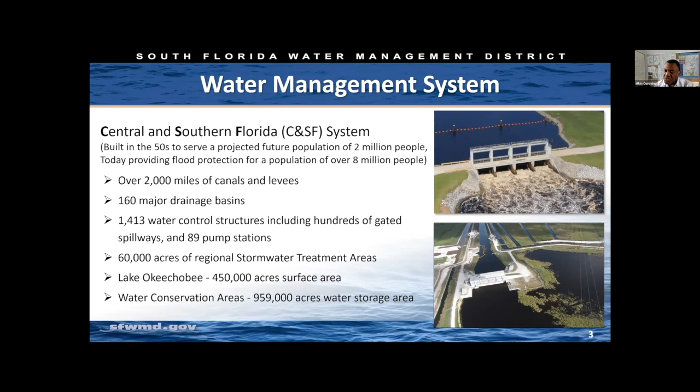It includes more than 2,000 miles of canals, 2,000 miles of levees, serves about 160 major drainage basins, and includes more than 1,000 structures. Today's talk is going to be focused on some of those structures, especially the ones that are coastal structures. So I'm going to try to set the why with this.

I'm showing a map to the left of South Florida. The dots in red or green are coastal structures. These are salinity barriers. They are gated spillways or gravity structures. They go along our coastline. Anything downstream of them is directly connected to the ocean. And there's a picture on the right that shows one of those gated spillways.

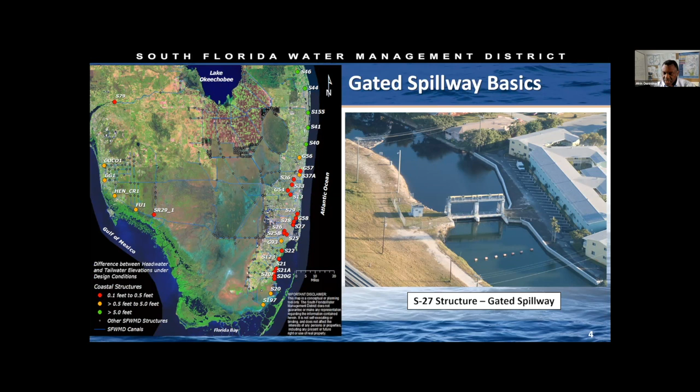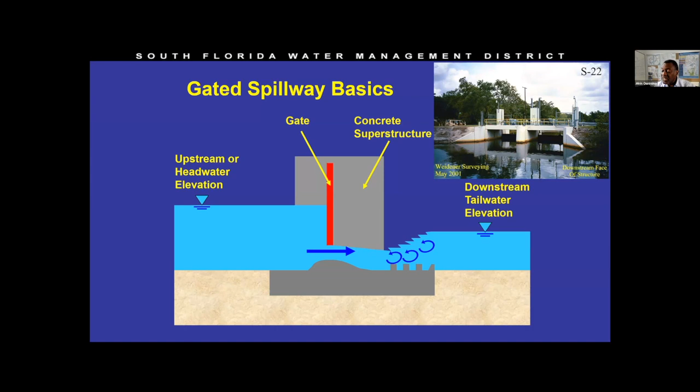The operation is a little bit complicated, but there's a way to simplify it to make my case. Assume that there are 2 levels that we base our operations on. Now, there are a lot more, and my water managers will be very upset, but this works. You have an elevation at which you open the gate and one at which you close the gate. Under normal conditions, you'll have your gate closed. You're holding on to water.

In Florida, with the flat conditions, you want to hold on to as much water as you can without draining it to tide. But if it is the wet season and it rains, your inland area would fill up. The canals will elevate, and you'll open the gate to manage that elevation, because uncontrolled, it increases your flood risk. Eventually, the event ends and the water levels will drop. And when they do, you get to the close elevation at which you want to close the gate because you don't want to overdrain.

And part of the risk of overdraining is if you drop the water table sufficiently, you might induce saltwater intrusion, or you might have flows coming into your system that's undesirable. So what we're beginning to see more and more is that

with sea level rise and the appropriate king tides, you're having conditions when your tailwater elevation exceeds the gate open elevation. And under these conditions, if you have a rainstorm, you would actually not be able to open the gate, because with the gravity structure, it's an equal opportunity passer of flows. Flow would come from the ocean side into the inland side, contaminating the aquifers, potentially putting water supplies at risk.

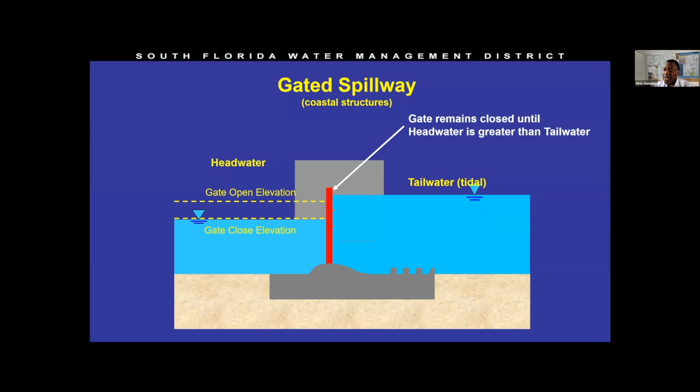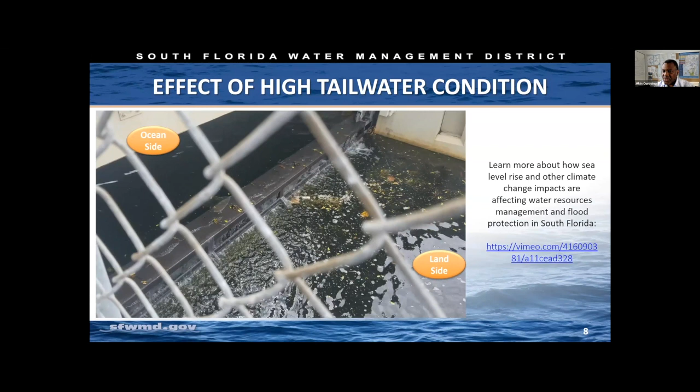Now, this might seem like some kind of distant future, but it's not really for us. The video I'm going to show you here is a snippet that was captured a few years ago with the king tide and the wind just right. You actually have a structure that's supposed to be flowing from right to left, and you can see that the water is actually coming back over the closed gate.

So the system I described to you is a primary system. The primary system is the one that the district and the U.S. Army Corps of Engineers is responsible for. But flood control in South Florida is managed through a three-tiered system where the primary system takes water from the secondary system and sends it out to tide or to storage for restoration purposes. But the secondary system collects water from the tertiary system, which is actually where people live.

So homeowner associations and large landowners manage their stormwater ponds. That's part of the tertiary system. They discharge into canals that are run by local government or special drainage districts. That's part of the secondary system. And they in turn discharge to the primary system. So for flood control to work in a region, we need to all be working together to make the system work. And for that, we had to take a total system approach.

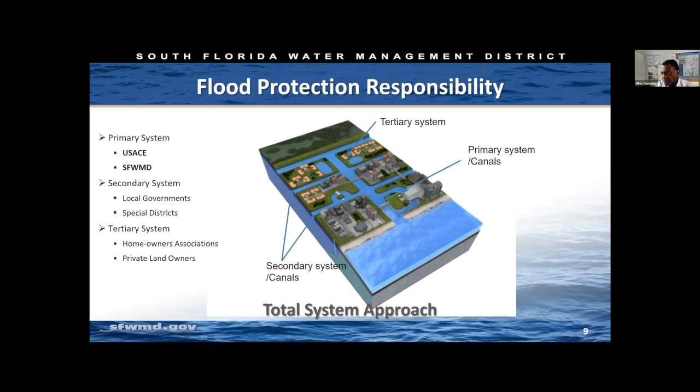Now, what are the sources of uncertainty? You've heard many of them over the last 2 days. I'm going to summarize a few here. Climate, clearly we're all thinking about climate. And in South Florida, with the gravity structures, sea level rise is a real problem that we're dealing with. And the uncertainty of predicting how much rise you'll have is one of the big uncertainties we have to deal with. Rainfall is another. And storminess and the effect of storm surge is another that we know that we have to manage and include in some of our thinking and analysis.

Another one for us is land use and development changes. When the C&SF project was built, it was projected to serve a population of about 2 million people. Today it serves a population of about 8+ million people. And many of the areas that were designed to be maybe agricultural fields or open areas where you could store water are now cities, which during rain events have to shed water.

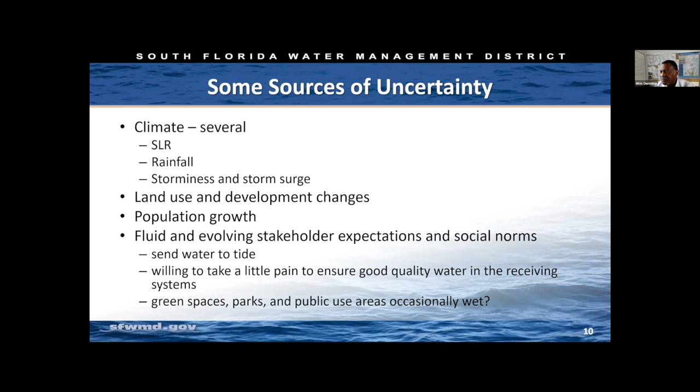A third area, which is an interesting one for us, is the fluid nature or the changing expectations of our stakeholders and the societal norms with regards to what they would accept to provide flood control. 30 years ago, it was simple. You safely send water to tide, and that's flood control. Today, we couldn't do a project that sends water to tide without looking at the water quality impacts on the receiving water system. There are a few other things along those lines, but these are all uncertainties that affect our planning process. To be able to plan adequately, we have to actually modify the traditional planning approach.

There are many good parts of the traditional planning approach that we retained. And on here, I'm kind of trying to show you some key distinctions between what we do now and what we used to do in the past. In the past, you plan for a future date. You try your best to get things projected accurately for that date, amount of rise, amount of water use, what would be in place. We've kind of found that could be somewhat limiting, especially with the uncertainty in this case and looking at climate-related impacts at a window of about 50 or plus years.

You identify courses of action, you evaluate them with models. These are all good things and we'll still continue them. We determine the cost of the potential adaptations and we compare that to the cost of doing nothing. And you come up with a cost-beneficial project to drive investment. And then we implement the projects over time and then track to see how well they perform. The changes we've made to that system in what we call an adaptive resilience planning process is we retain most of the things in the traditional planning process, but we have this requirement for a remain functioning condition.

A colleague of mine uses this a lot, but essentially what we're talking about is between the time you actually plan your project and that future condition you're aiming for, you want to make sure that the system doesn't break in the middle someplace. And so your analysis should look through time and make sure that your projects are sequenced to avoid you getting into some unacceptable conditions.

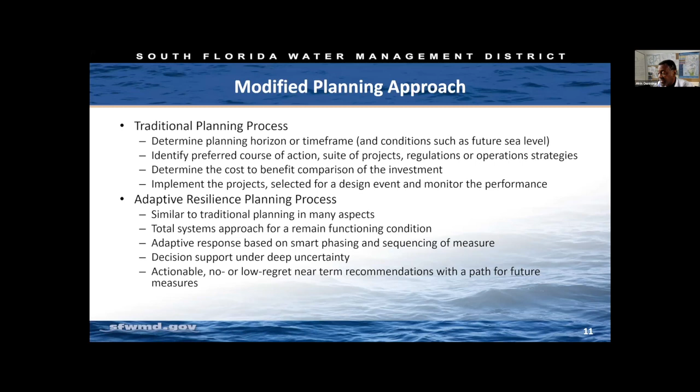You want to come up with projects that are properly sequenced and that are adaptable. Also, we want to make sure that we can identify no regret or low regret strategies that can be implemented early. And I'll speak to this a little bit later.

So the approach we use can be defined by this model. And it was one of the early decisions we had to make. If you couldn't tell exactly how much sea level rise you'll have in 2085, is there some other way of posing the question that makes our hydrologic tools capable of addressing the question that's been raised?

And what we came up with was this approach that says, if you can determine a state or a threshold at which your system stops performing the way you need it to, it might be possible to use that information and the knowledge you have on how long it is to develop a project to determine when you must be risk aware and have initiated a solution.

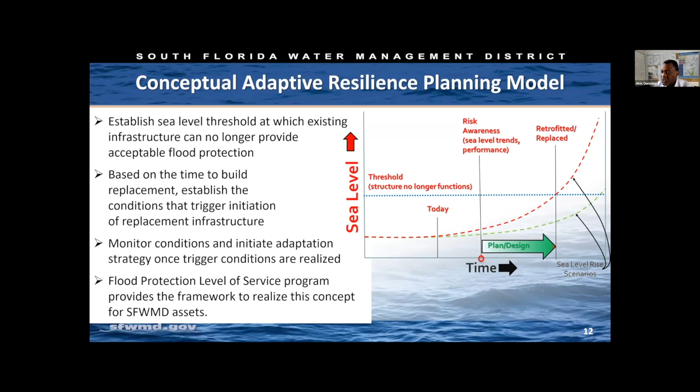We kind of found that we could do this with many of our structures. A lot of the things that we do, we were able to rephrase the question in a way that makes our models useful. And we kind of imbibed this, or incorporated this, into our planning process.

This is the same slide. I grayed out the background, retained it only to show the 3 different time frames. And I just use this to reinforce the remain functioning concept. If the red is some system response relative to an acceptable threshold of performance, you have a system today that is slowly getting worse, and you want to make sure that you keep implementing solutions in some way that makes sure that you don't trip that threshold, you don't reach that tipping point.

Now, some of them could be small lifts, and some of them could be big lifts, if you're looking at something that has to do with maybe a major structure or construction. Okay, so I'll go ahead and move on. Actually, this slide shows one more piece. It shows you what happens if you have essentially no action, which is always something we compare against. And then it shows you what happens with each of those interventions over time, preventing you from reaching that threshold, which is the black line.

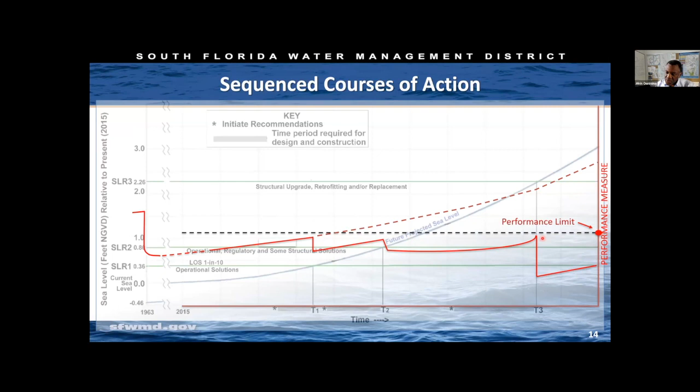We used a very comprehensive approach. And in that approach, we assembled adaptation strategies. We used hydrologic models to test those strategies. We looked at current conditions and future conditions, looked at different combinations of sea level rise based on the thresholds at which some of our structures would potentially no longer be efficient. We looked at different return frequencies of rainfall.

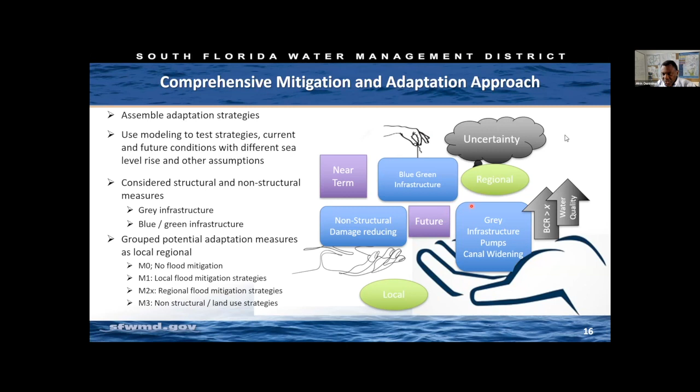There's the M0, which is do nothing, no action. There's the M1, which captured a lot of the local projects. There could be anything from seawalls, local pumps that pump into the primary system. Then we looked at a suite of regional projects, the M2 solutions, and then we looked at non-structural or land use type solutions. And we put all of this through the models to try to see how the flood risk in the area would respond to those potential measures.

I'm beginning to show a few slides that some of you familiar with DAPP may start to recognize. One important thing with this approach is you need to be able to pick some kind of a threshold over which you would assume that your measure has reached a tipping point and you need to move to another particular measure. For our project, the tipping point or the threshold we picked was the expected annual damage. It was an economic metric, and it's a difficult one to select, but we landed on this particular one. We've used it in a previous study in the past, and it was one that we felt would allow us to compare things to current conditions.

So essentially, what this plot is saying, the plot to your right, is that your black line is the expected annual damage under current conditions. Now, as you have different sea level rise conditions, your blue line, which is your no action condition, shows a worsening or increased annual damage. That's the damage from flooding. Your different solution suites or alternatives will shift that line down. But at some point, each one of those lines will intersect the black line, which represents its tipping point, the point at which that solution no longer meets all your needs, and you need to consider adding something or transferring to another solution set.

Now, there are a set of lines at the very bottom that never reach the threshold. Those are the structural solutions or land use solutions. They will work, but they may be extremely expensive to implement. In this case, it was a matter of maybe elevating roads and elevating structures. The area still floods, but you don't see damages. And since our metric is about economic damages, you see a reduction in the damages, and you don't go to the threshold within the time frame of most of our analysis.

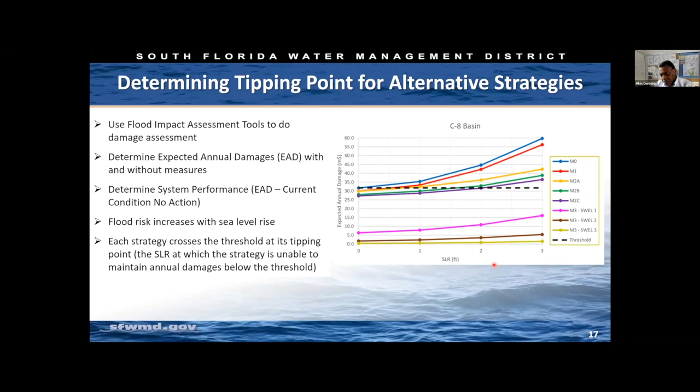If you put different sea level rise projections and align them to the amount of sea level rise, you'll be able to kind of take this information and infer some time from it. So taking a look at this, for example, you're saying that your M1 solutions, the blue solutions, would probably only last you to between 2031, 2037, which is just around the corner. So you must have other solutions if you are looking for the long term. So this is the result essentially for the C8 watershed.

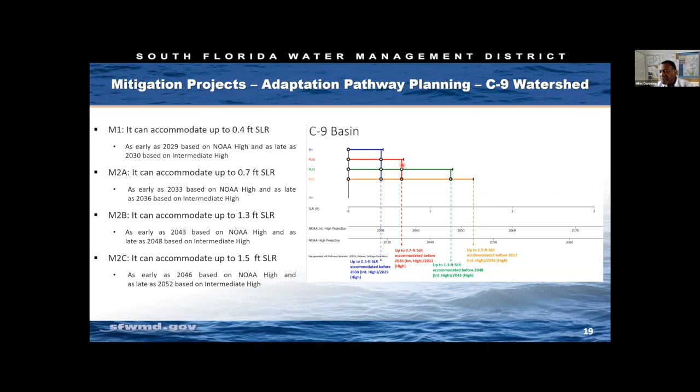So, Akin, you've got about 3 or 4 minutes left. Tracking.

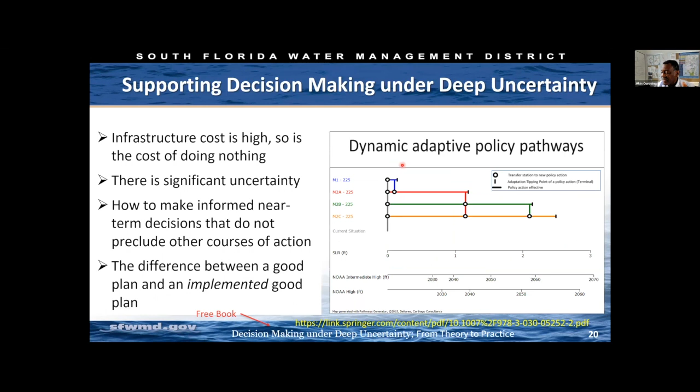So what are some of the things we learned from this? Doing nothing has a cost. There's significant uncertainty, and how to make better near-term decisions is important. We believe that tools like DAPP may be the difference between doing a really great job that sits on a shelf and actually having an implementable and implemented plan.

We have some challenges that we're still trying to address. I mentioned one of them has to do with the fact that we're trying to make sure that our projects are ultimately equitable. And we're learning quickly that some of the tools we have lend themselves to a particular type of solution, which may be different than the objectives of the folks who want to plan solutions in the future. These are some of the lessons learned and things that we're already incorporating in the new studies we're doing.

We're exploring the use of emulators that run this analysis a lot faster than robust hydrologic and hydraulic models, which are unfortunately very computationally intensive. We believe that these types of tools will allow us to sort through more alternatives and combinations of solutions, and would also allow us to better integrate stakeholders in some of the trade-offs of the decision making. We also believe that it's going to be very important in our future projects to improve the mix of the projects that we incorporate in each of the alternatives that we take forward.